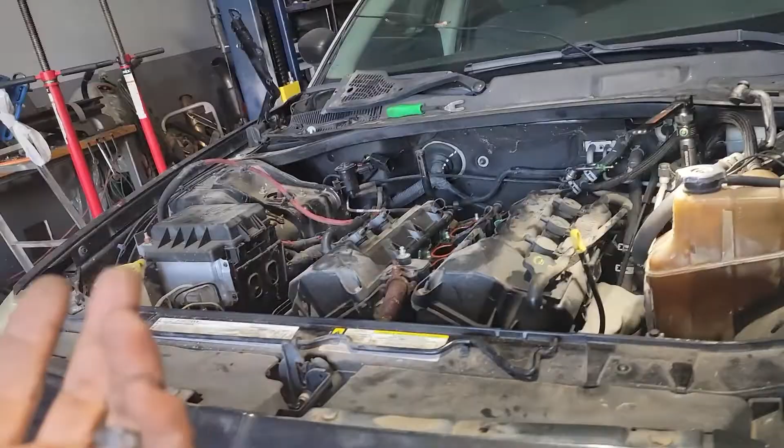Two projects in the shop. The first one is my Magnum that I bought. Was just gonna fix it up, get rid of it. Sort of a flip thing, but never really got around to it. It kind of ran, the tank was varnished. I put pumps, whatever, and it kind of runs, but doesn't run good.

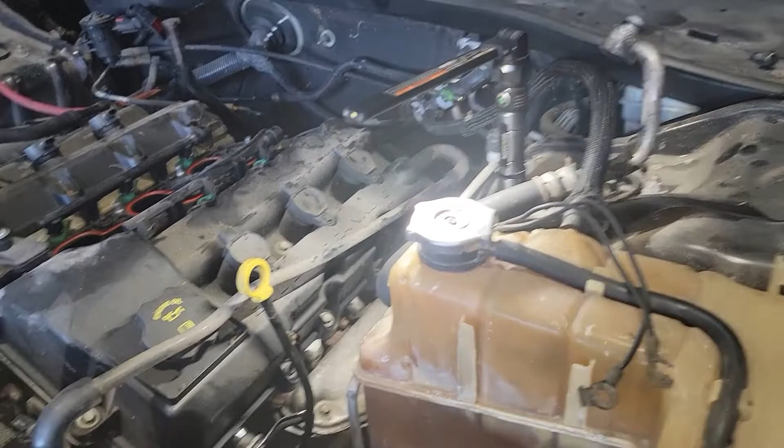As far as it runs good, the motor's solid, but either the injectors are gummed up or something like that, which very likely could be because the tank was disgusting varnish. That's basically what it looked like inside that injector.

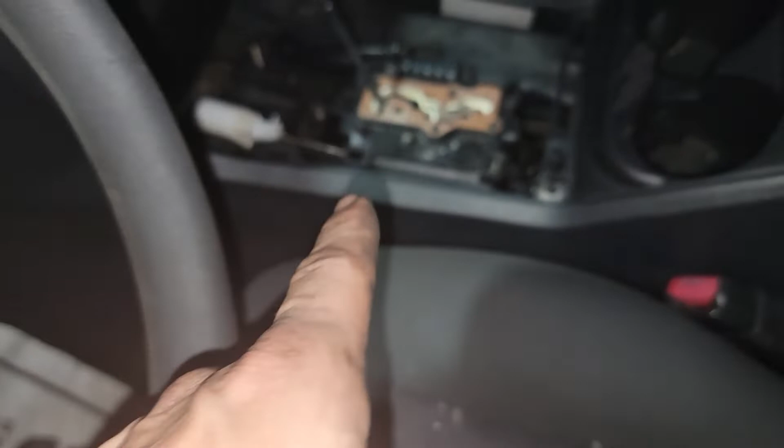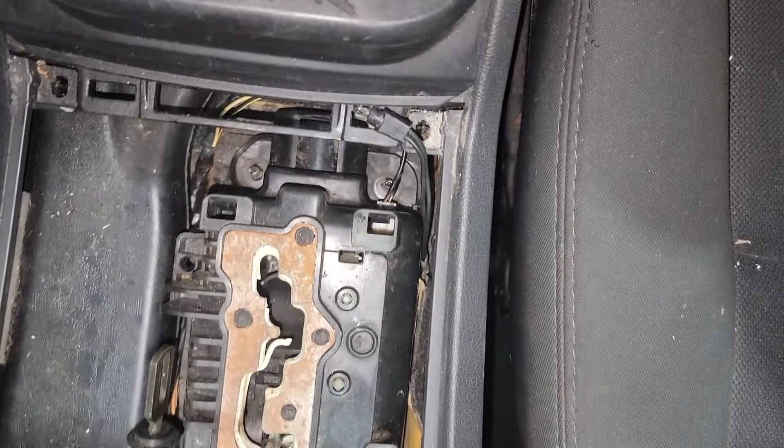So I got all that fixed, and then the shifter was an issue. There's a piece up in the front that breaks that the cable ties to, so I bought the updated piece and put it in. It still didn't work. But then I realized down in there's a solenoid that actually unlocks when you press the brake, and it's bad, and I don't know anything about that solenoid.

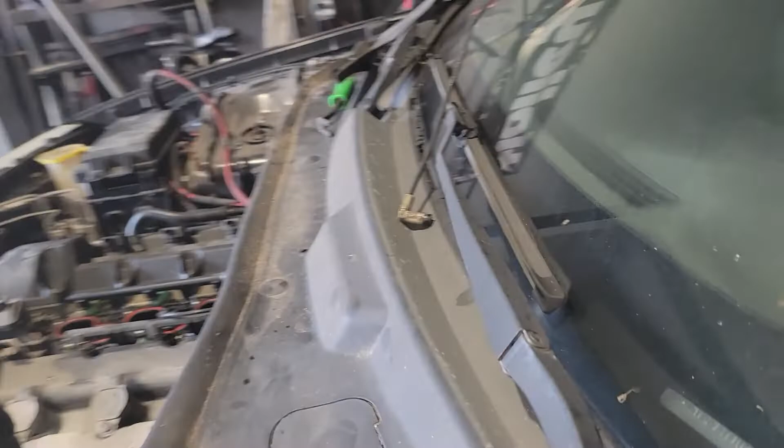So literally this is how it sat, with all the pieces all over the place, and I was like, I'm out, done. But I came across a deal.

Basically a Vortec 6.0 out of a truck, like the LQ4. So I came across that long block. I bought it a couple years ago. Well, sort of bought it—didn't really buy it, I obtained it. The gentleman that had originally bought it passed away, so we're now in possession of the motor.

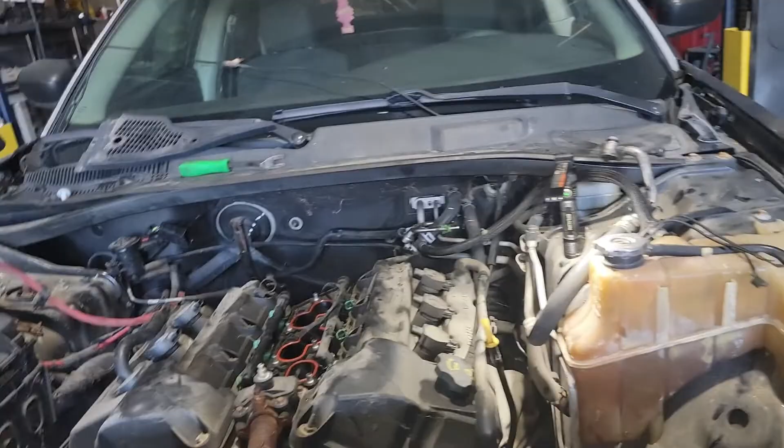So that's what we're going to do. We're going to go ahead and pull this motor out. I already got everything off. I didn't record it, but I took the airbox off, then the intake off, and then started disconnecting all the harness. Just figured if I'm going to sell the motor and transmission type of thing, I'll sell it with the harness and the ECU.

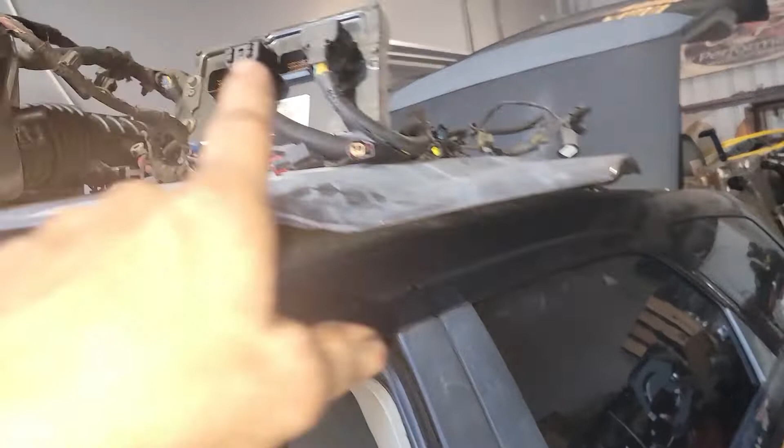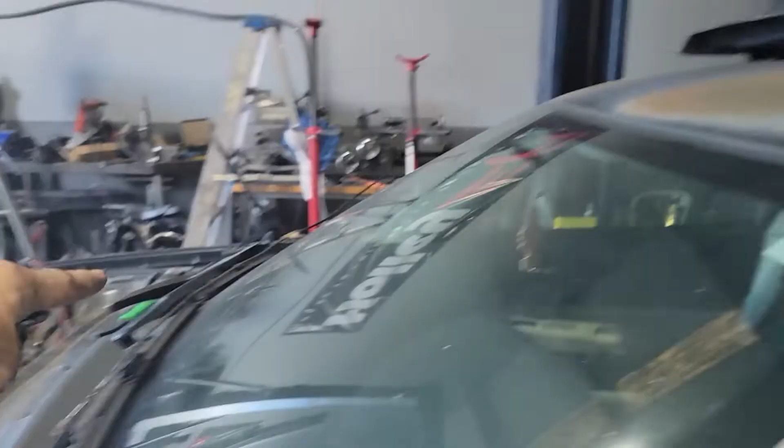Pretty neat, actually, I've never worked on Dodge really, but those two plugs are the entire engine and transmission harness. So you unplug, like I unplugged the 4 plugs from the ECU, pulled the ECU out. It sits down inside that little triangle opening under the cover here. I pulled it up, unplugged all 4, and the whole engine harness came out.

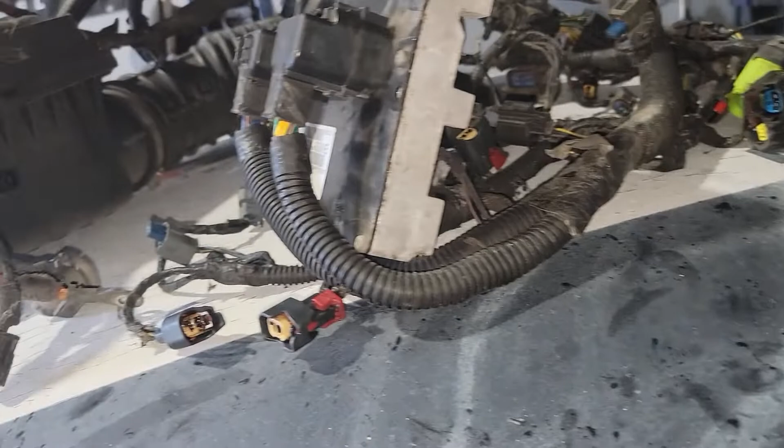The entire harness—this actually goes to the alternator, so that's incorporated in here somehow. Maybe running, I don't know, but it's incorporated in here somehow. The whole harness completely came out, and then there was nothing to cut, no grounds, no nothing.

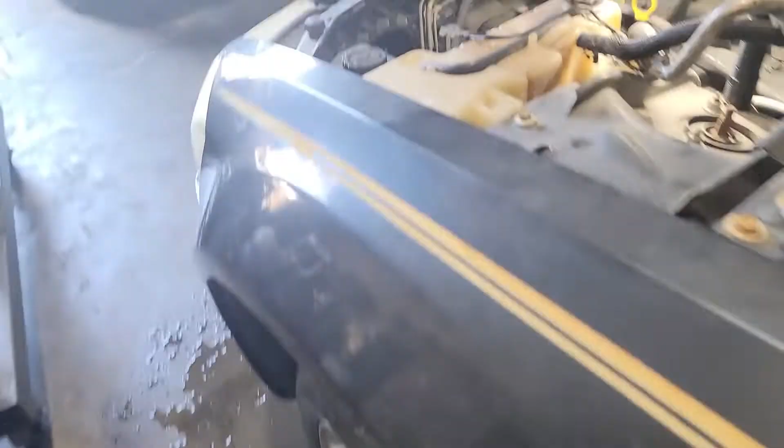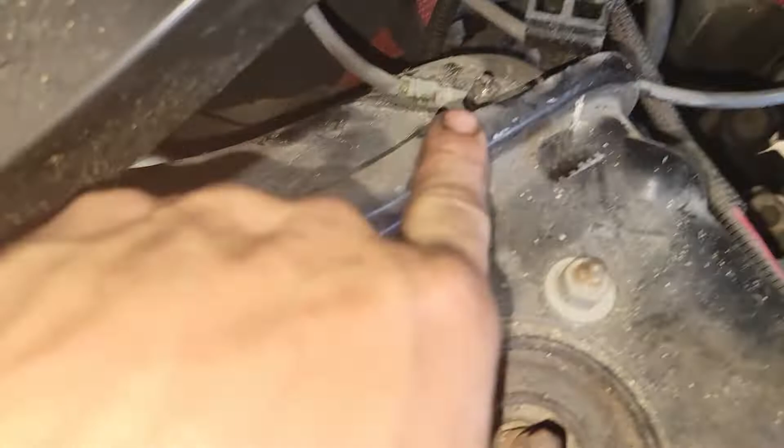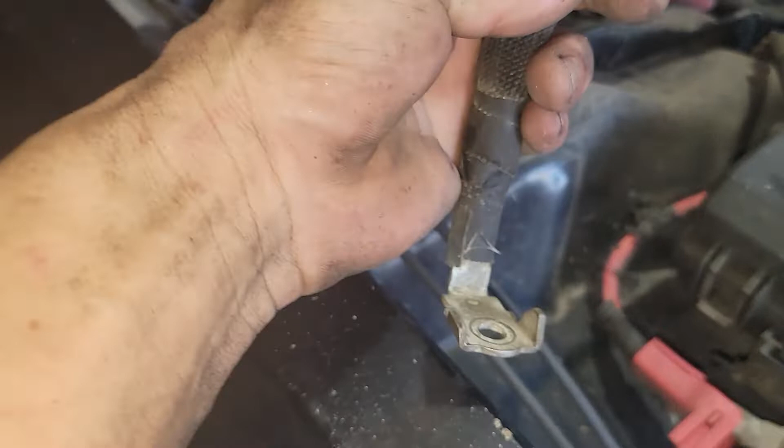I disconnected all the grounds, left them on the car so that I have grounds there. Like these were here, these went over to the cylinder head or something—I left those. There's another one down in there, this big one, I left that. Oh actually, yeah, that wire went to the starter, it clips into this somehow, but I don't know where it goes inside, whatever.

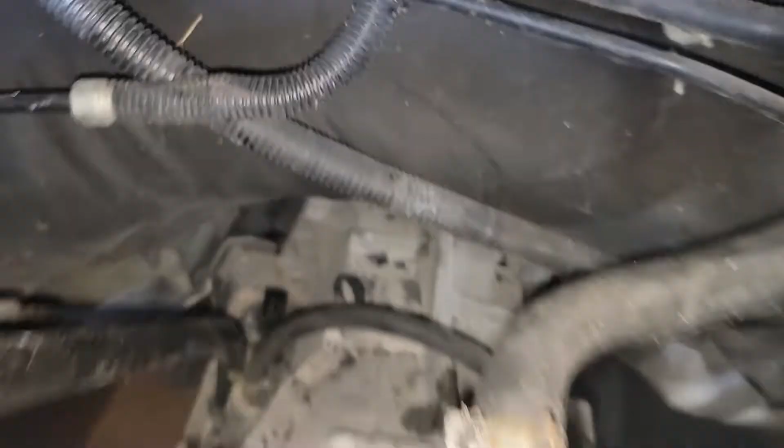So I got everything disconnected, everything apart. All the power steering lines are off, the AC lines are removed, fuel lines disconnected off this side of the rail, which I'll probably pop out of the quick connect there and snap this piece back into the rail because I'll probably never use that piece. Or I may even take it off from there and connect to my fuel line. I'm gonna say the fuel system should be good in this—the pump may be on the small side but it should work.

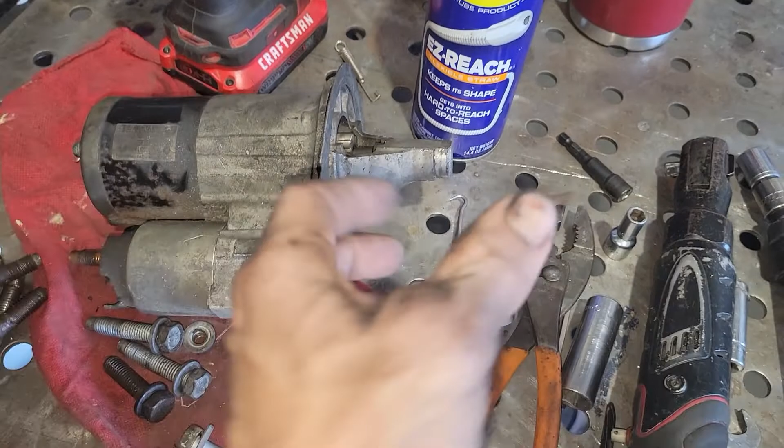The motor mounts from underneath, super easy. Most of the stuff on this car is pretty easy to get off. The starter was a pain in the butt—the snout on it is real long, so it made it really hard to get out of the hole. You had to have all the wires off, but not being able to get it out of the hole made it hard to get the wires off because the big wires sat against the block side. So it was a little bit of a fight, but it wasn't too bad.

But I got that off. Exhaust is completely off on the floor over there, all in one piece. I took the whole exhaust off in one piece, from the manifolds all the way back to the muffler. You could see way back there. Drop that.

Transmission's disconnected minus the drive shaft, which I have to pull. It's a bolt-in drive shaft with torque bushings, so I have to pull that out.

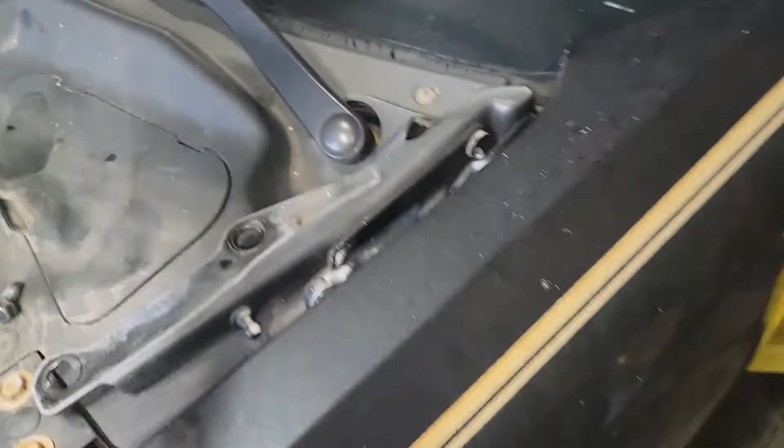That's next, and then I'm gonna hook the chains up to it and start yanking on it. It's convenient, it's got 2 bolt holes there that I'll use, which do not duplicate to this side, but there's one back there and one up here, so we should be good. I yank the whole thing, motor, transmission, everything together.

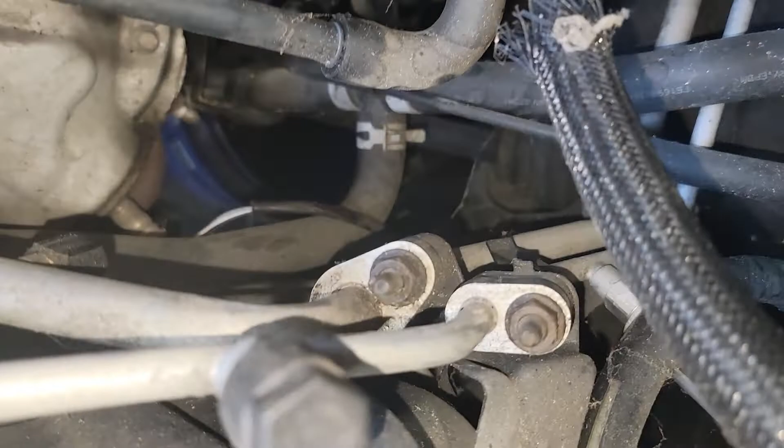I think I got 1 heater hose there, then 1 down there, down there. Clamp's already off the bottom. I'll get that one off. I'll put it up on the lift, take the drive shaft out, and I'll be right back.

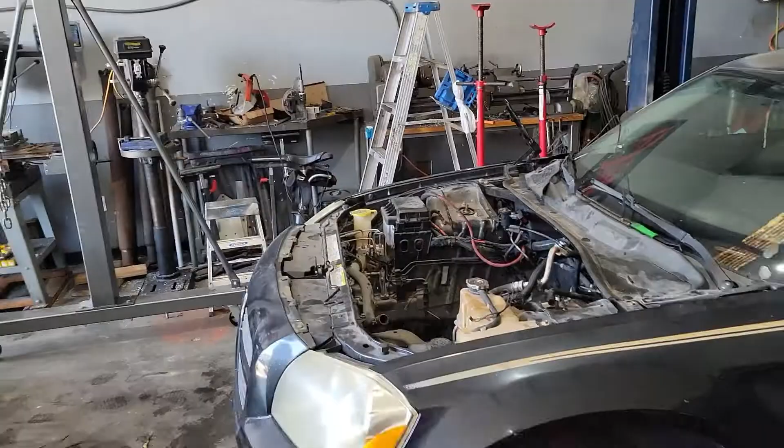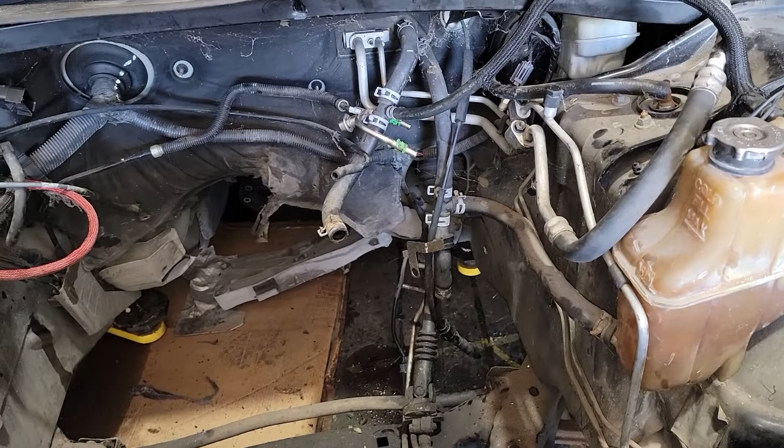All right, check it out. Motor, transmission's out, everything's disconnected cleanly. The only thing that I don't see is a return line for the fuel.

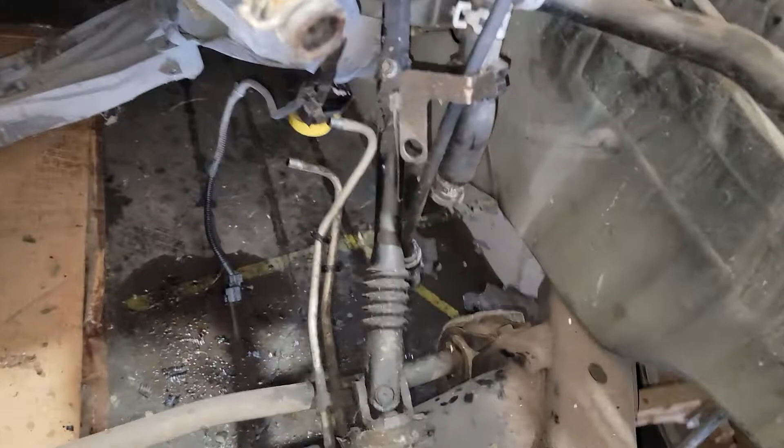So, not really sure how this fuel system works in a sense. That's obviously the feed, it goes to the rails. So I don't see a return line, so I may have to run a return line. I'm not worried about that, but the transmission lines are obviously on the wrong side.

Yeah, I made a mess. But the AC lines, I disconnected them. Power steering lines, everything's disconnected, neat and clean.

And I pulled the motor out and forgot this heater hose that was on the back of the motor, but I found it before I yanked it out. So should be good.

My goal for this car is 100% have it streetable, 100% streetable.

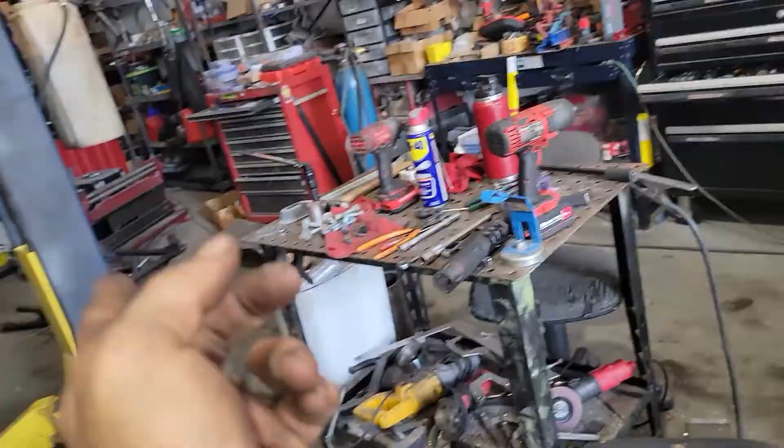So it'll have power steering, which I have a different bracket set up from that motor there that I may use on the front of the 6.0 if I can. And it kind of has more of like the F-body style pump on it.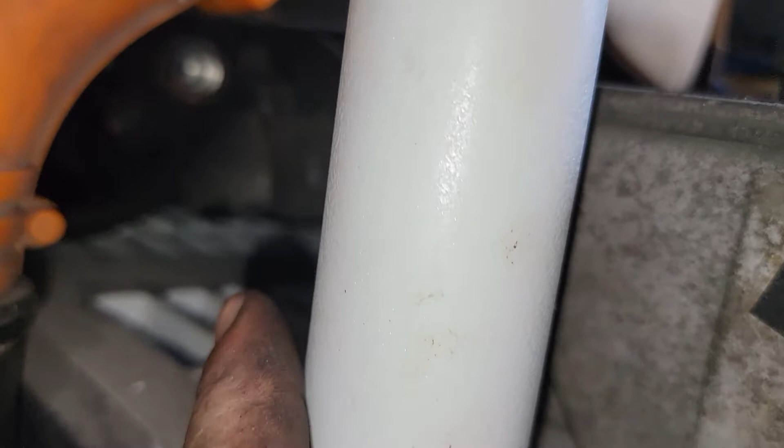You can see it down in there. And I believe it has a remote reservoir. Yeah, it had a remote reservoir.

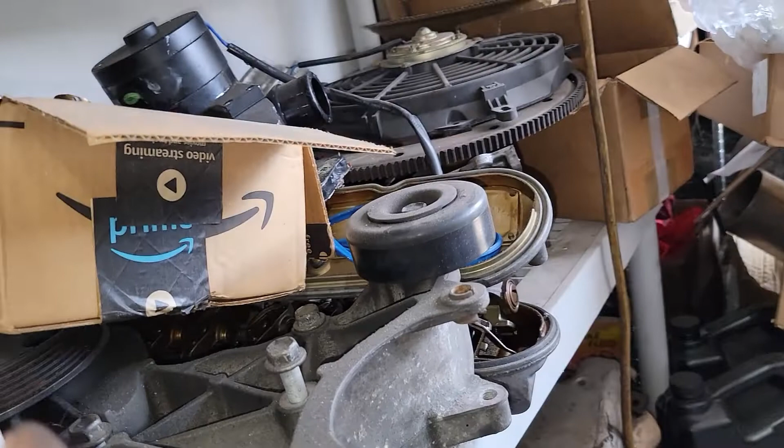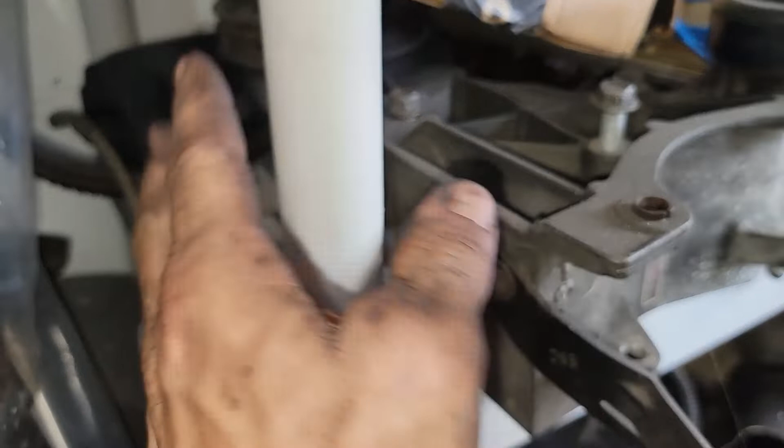Yeah, so I should be able to use that pump there and this bracket for the front accessory, and that way it'll be a little bit easier for me to hook the power steering back up. What was I gonna say?

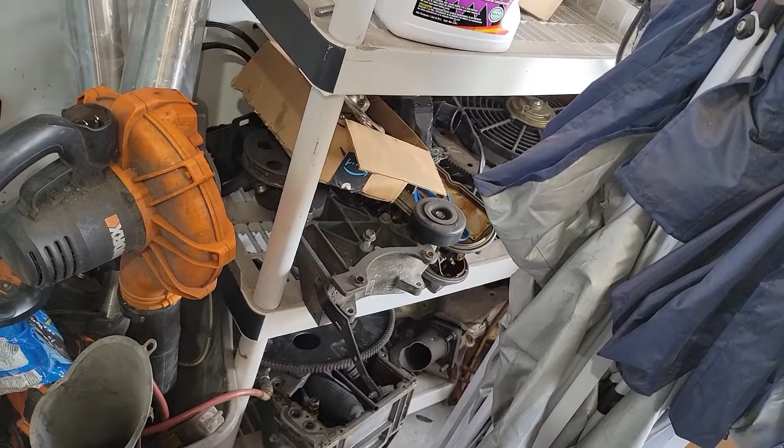So what I have so far is a big pile of parts over here. The debate right now, a couple debates actually, in my mind.

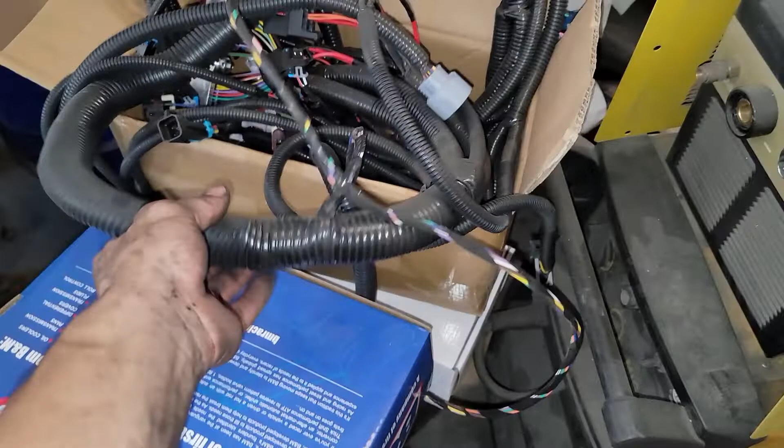I did get off of Amazon, I did get one of the cheap harnesses for a standalone OEM style ECU setup, being that this is kind of not going to be a turbo build race car type of thing. And I'm actually fairly pleased.

The connectors, every connector is brand new, every wire is brand new. The sheathing they used, it's just the corrugated crap, which I don't like. But underneath, they taped the entire harness. So I can literally pull all this off and just re-put on like a nice braided wire wrap on it and have it look a little bit cleaner. But it has everything on here.

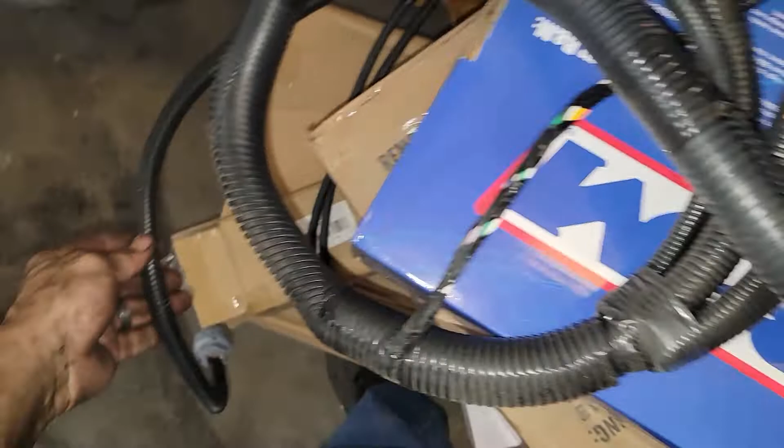This said it's for a 4L80, but it only has one input sensor. I'm accustomed to doing the 2 input sensors, so I'm not sure why there's only one. Well, then again, there's 2 right there. I'm wrong again, there's 2 input sensors for the transmission. So this is 4L80, but it has everything.

It's got the fuse block for everything. It has a relay for something, I think that's to turn the ECU on. Like everything is here, you know, it has nice grounds. Everything's to a nice ground, just like factory stuff.

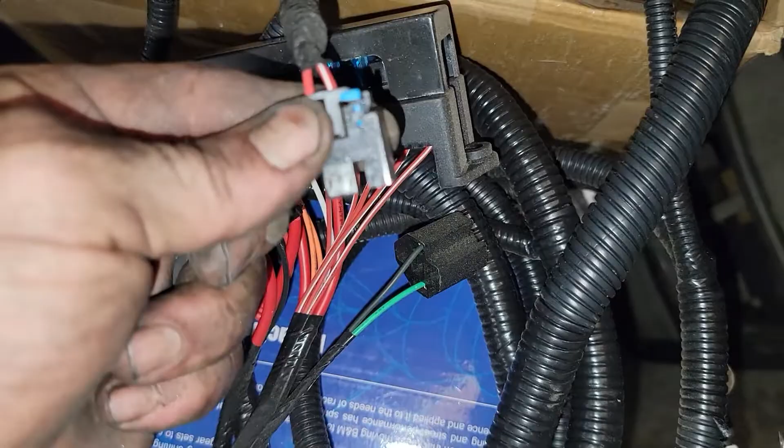There's another relay in there, and then it has every injector adapter. So these are the Multec, whatever, like the GM truck style. Then it has the Multec to EV1 style in a bag, and it also has the Multec to EV6 in a bag, which I thought was pretty crazy.

So this is the company here that I got this one from, Pangolin. I don't know, Pangolin, I don't know, it's off of Amazon. It was like $129 or something.

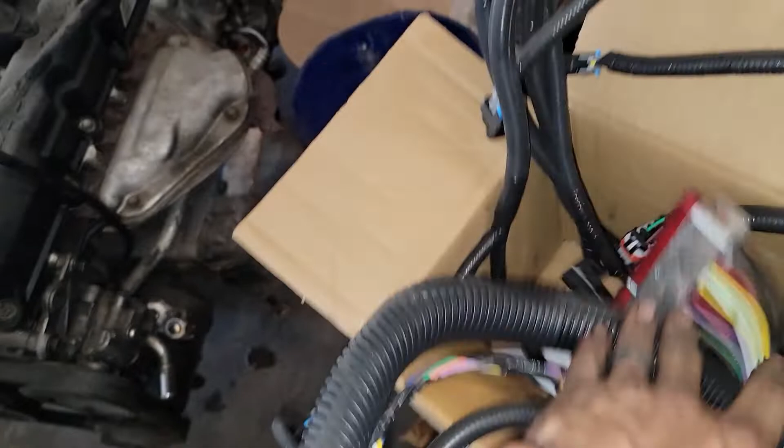Fairly cheap. So I have a bunch of ECUs that I can make work with it. I have HP tuners, so I could throw a tune on the car.

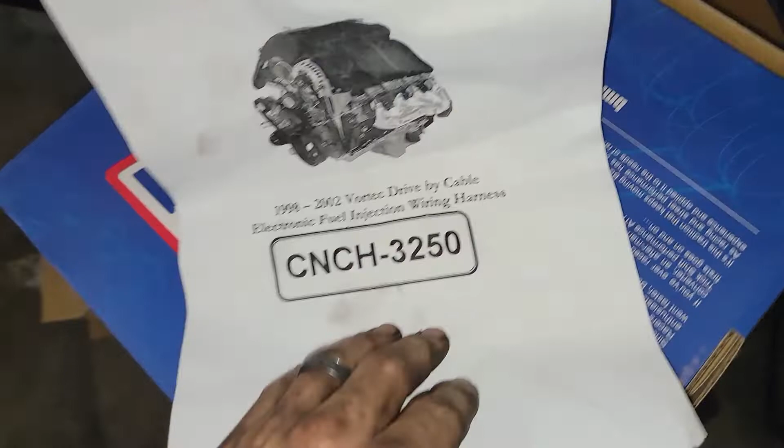It also has every wire for like your accessories, gauges and whatnot. It has an instruction book, I never even looked at it to see what all it does have. So it's a 98 to 2002 Vortec drive-by cable.

List of terms here. It shows you where every single wire goes. So it lists out every single wire that's in there.

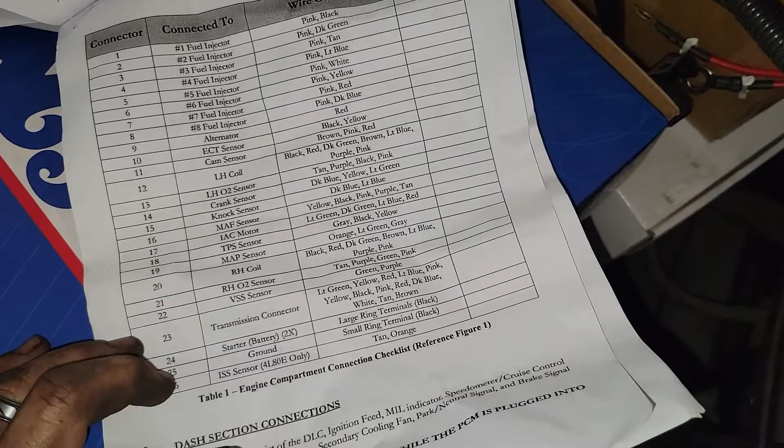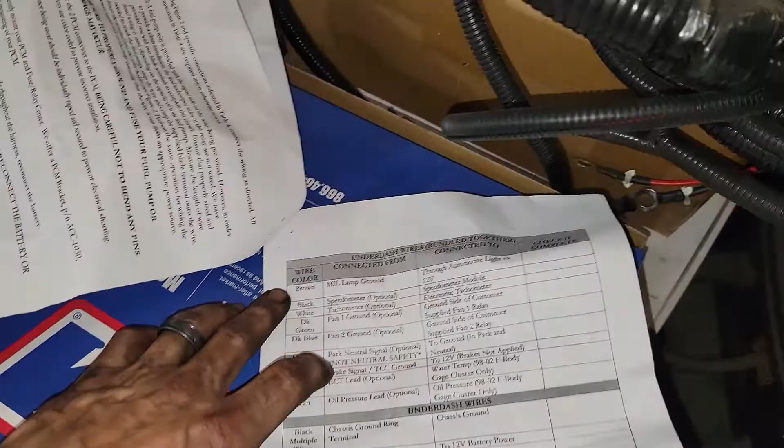Dash connections, so wires in this section are DLC. There it is, brown, so in this loom right here, you got brown right there for the check engine light. Black, kind of black right? I don't know, that looks green to me. Looks green but it's got black on it. So black is speedometer, white is the tachometer.

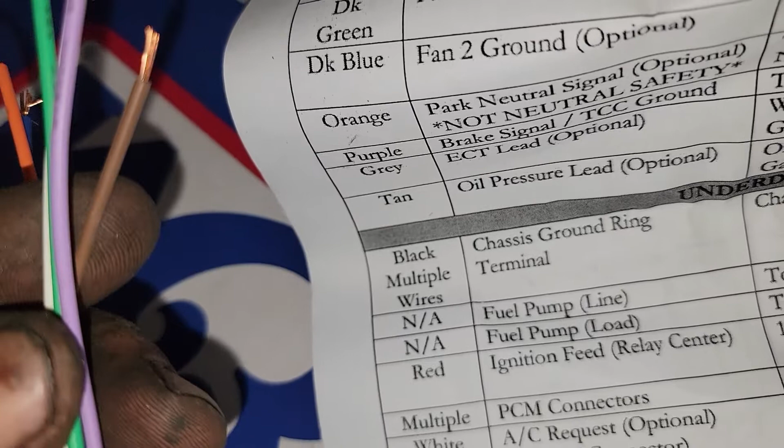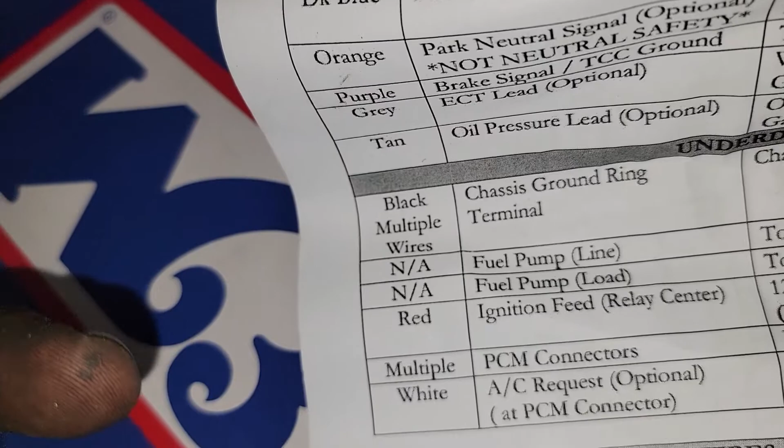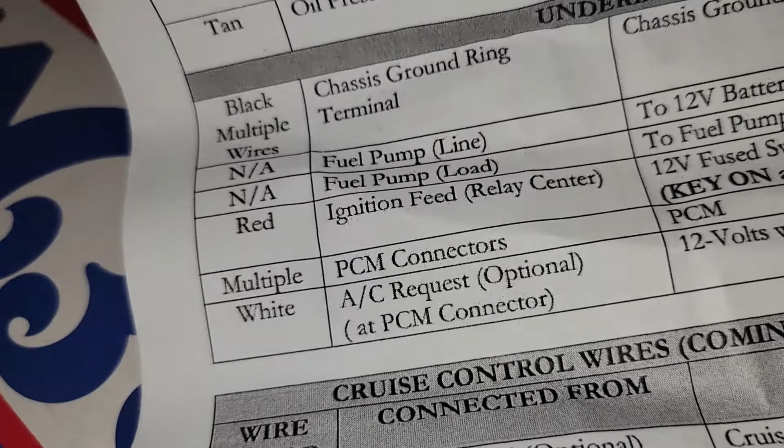Dark green, okay, fan 1 ground, dark blue is fan 2 ground. Orange is park neutral signal, that's pretty cool. Purple is brake signal for the torque converter clutch. Gray ECT lead, water temp. Okay, I don't see a gray. You bastards. Yeah, I don't see a gray one in there. And a tan? I see a yellow.

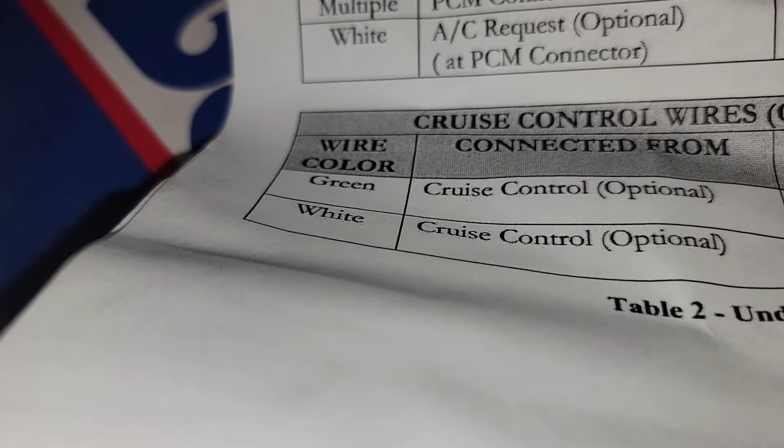Two browns, one has a white stripe. So I'll have to figure all that out.

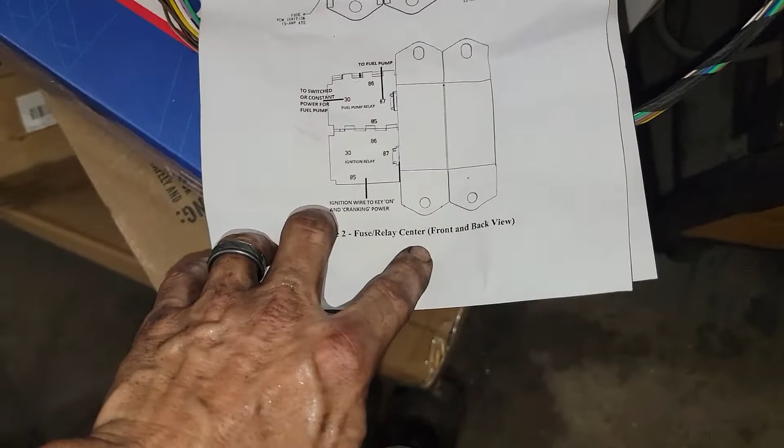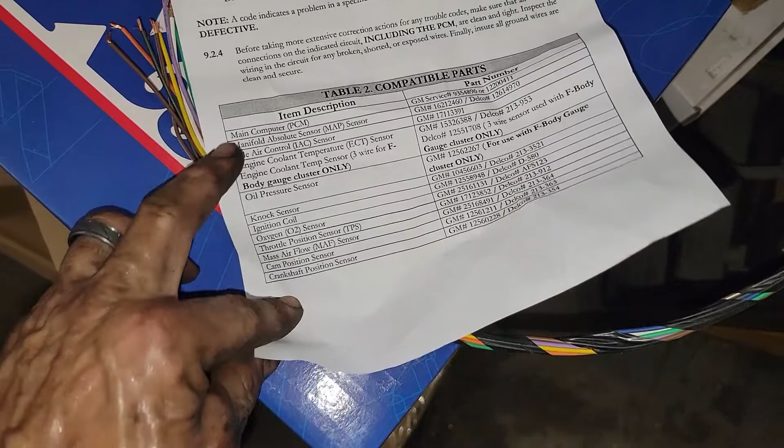Under dash, I have no idea. Oh, then there's cruise control. Oh shit, so this has everything. Oh actually, yeah look at this. Wow, look at this, look at this. Would you just look at it? So it's got fuel pump, ignition relay, tells you how to hook up for the cooling fan, tells you how to hook up for the brake switch, tach, you may need a resistor, okay. Tells you what MAP sensor, idle air control, tells you everything. Well, I mean, tells you a bunch of stuff.

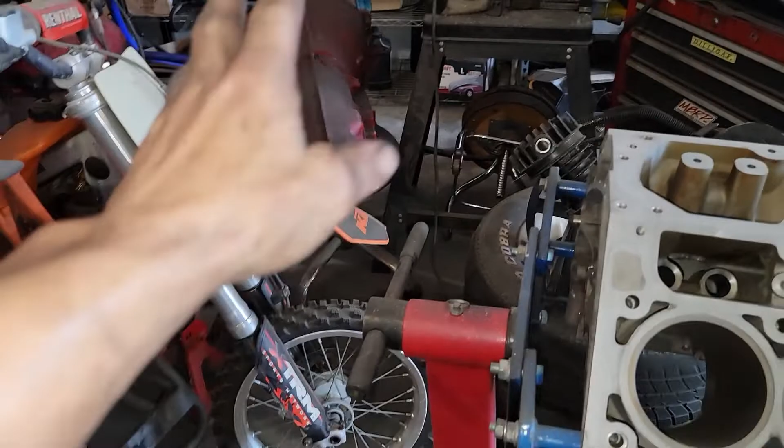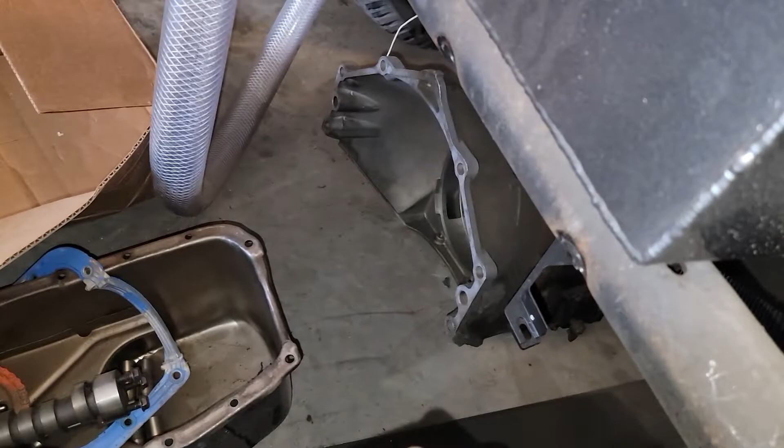Who knows if it's everything or nothing, but yeah, so I got that. Whatever, I do plan to do a 4L80. I have one here that needs to be looked at. I have one there that needs to be looked at. And then hiding in there somewhere, right there, is an empty case that I use for mock-up. But I also have every single part for it in there, so I have enough 4L80s. That's what I'm going to do.

So I bought this one, a B&M Magnum Pro stick with dual buttons, part number 81104. And it's freaking nice, I actually really like it. I'm not usually a big B&M fan, but I kind of like it. So I plan to have two-step on there. I did order an MSD two-step box. Why not?

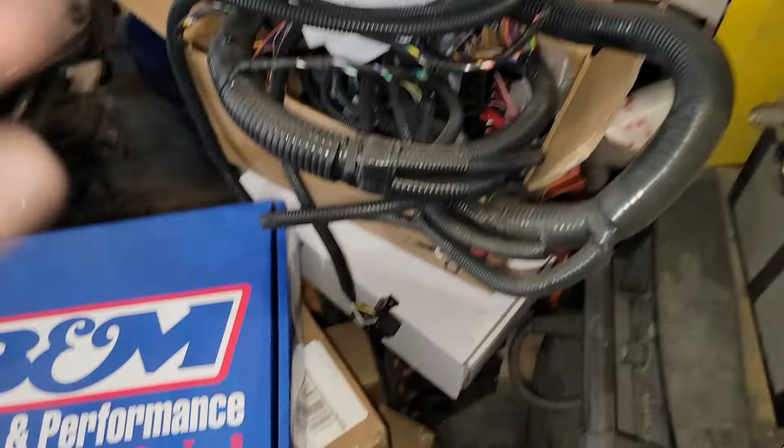And that was kind of my big debate. If I bought a Terminator X Max, you're looking $1,300-ish, but it has everything, it has boost control, it has everything in it. So you really get a lot for the money. But if I did that, then that adds a big expense to the budget, and I want to do a cam in it and all that stuff.

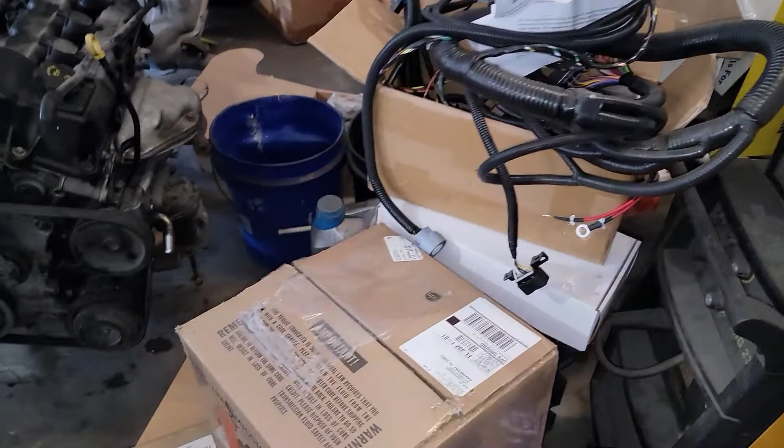So I said, well, why not spend the money on a harness, and then I could do a converter instead of a stock converter. So this is Total Transmissions of Chicago. I saw them on another channel, I don't remember which one, I screwed up and didn't write it down. I talked to Justin over there, dude, super cool. Never used his converters before, but for the 4L80.

It's a 2800 to 3200 lockup converter. It's threaded, the flange is threaded, has a coat. I don't know if that's a coating or if it's just been sandblasted to almighty hell. But so I got that.

So we had a stall converter, and then I got carried away and ordered what would be called the Sloppy Stage 3 camshaft. There it is. So it's an Elgin E1841-P Sloppy Stage 3. Intake duration 238, exhaust duration 242, intake and exhaust lift is 595.

So this cam's got a really good sound. I know it's a sloppy mechanic cam, and I'm always like, I'd never do that, but for the price, this could be found on Amazon. It's billet steel, so I'm gonna give it a shot.

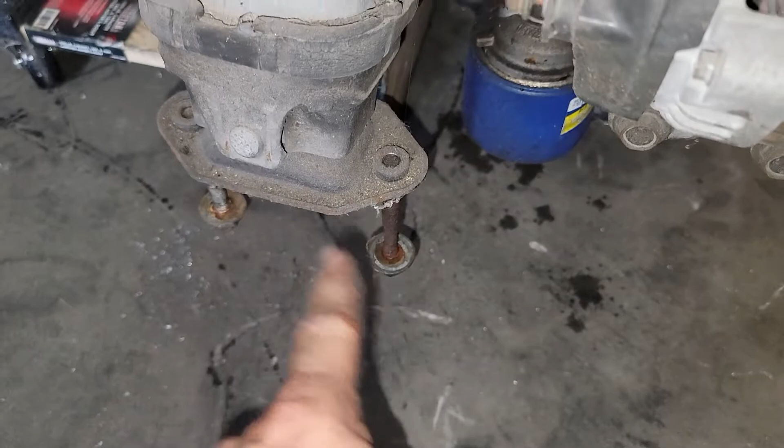Oh, this is like a universal motor mount, because every single freaking piece is individually wrapped, because the way the frame is on the Magnum, there's no motor mount. Well, you could probably do like a Corvette style motor mount, but these go through the frame. I'll show you.

Those two holes there and these two holes here, so those bolts drop through the frame. So being that it has that subframe there, I'm thinking I may need to cut that subframe out to clearance for the oil pan, and I'm okay with that because it has a front subframe. So I'm all right with cutting that frame out, or cutting a section of it out and then plating it and doing sort of like a bar to support it back. I don't know, whatever.

But it also has the frame up here, so I could weld. These are like the 2 tab style. So this goes on the motor, and I got these so they're centered. So the bushing is centered, but it has the slots to adjust. Sometimes you'll see these are shifted way back on the pad. That's gonna be the other one.

Bullshit. She's coming down, Captain.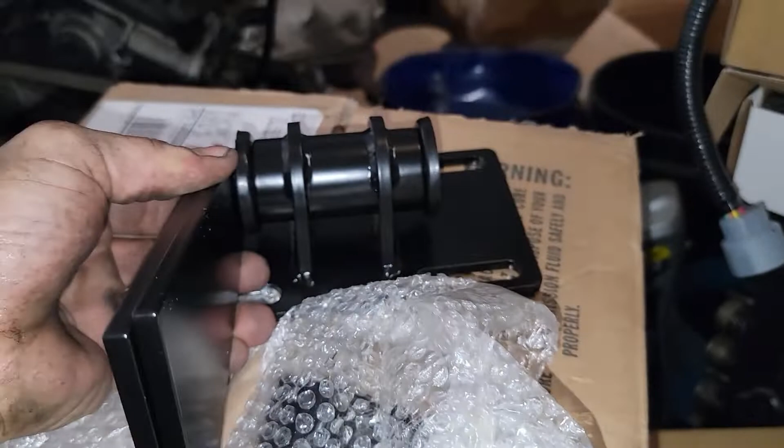So these came with everything. So these long tabs here, take 2 of them, put 1 on each side, put the bolt through it, and then you could weld this bracket to wherever you want. Of course, grind off the powder coating that they put on the weldable bracket, and then you can weld this bracket to wherever you want. So I'm going to try to stand them up on that subframe. If that don't work, then we can go sideways to the frame. If I need to make these a little bit longer, it won't be a big deal.

But it came with the bolts, the nuts, came with everything. And again, this was super cheap. So I'm tallying up every single dollar so far that I have in it. And to be 100% honest, the converter was the most expensive part. It was like $429 shipped, $480 shipped to my door.

So we're gonna be trying Justin out. He doesn't do big performance converters like we do with the drag cars, so that's a little unfortunate. But if we do get some more people that want converters for kind of streetable type stuff, we have all that.

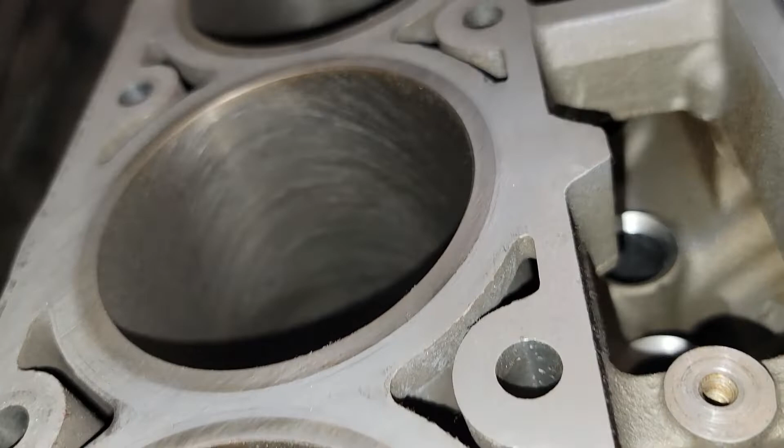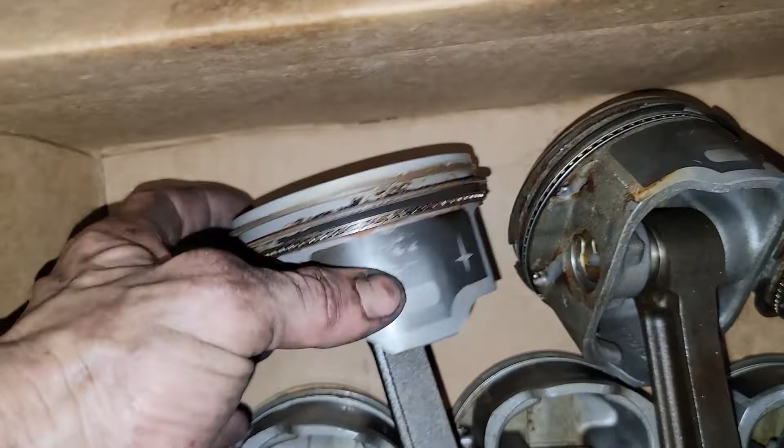So I got all that stuff. I got the 6.0 in the other bay. I'm also going to be putting, they're hiding back there, those are a set of 243s that came off this 5.3 that are spotless. This block, I got this as a long block, and I barely ball honed it, and the cylinders are like perfect. So this is a Gen 4 aluminum 5.3. Even the pistons, they still have all the factory coating. These aren't even cleaned up, and there's hardly anything. Oh, there was some carbon on the top.

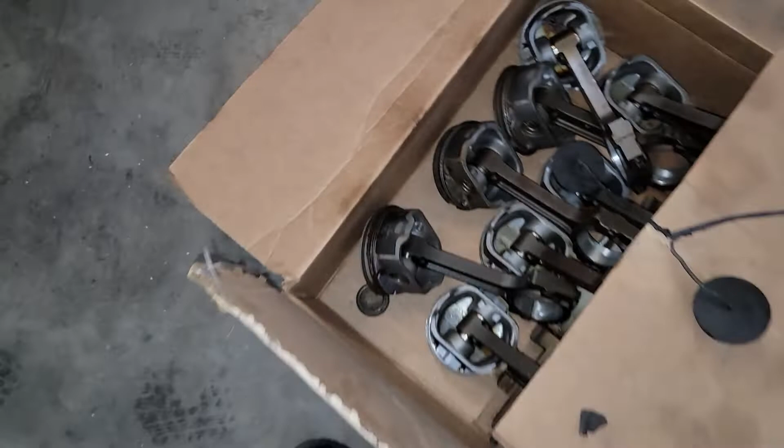I did wipe them with a rag, to be honest. But everything's really good with that motor. So here's another debate I have: do I do a Gen 4 aluminum 5.3, save the weight? That null and voids that harness, which I could convert it, but, you know, why bother? So I'm not sure. A lot of decisions.

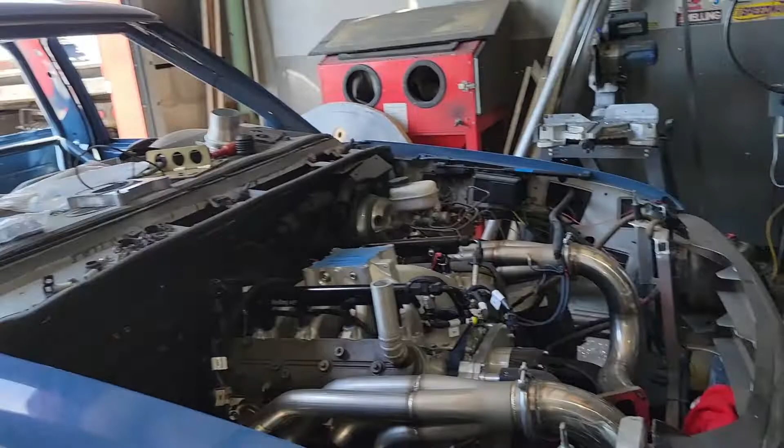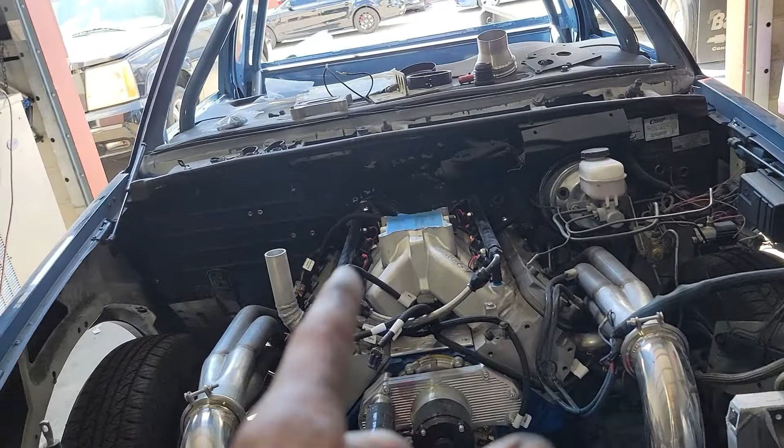I don't know. So kind of working on this while we are working on Jeff's Smurf S10. I'm calling it the Smurf because he painted it blue and it looks like Smurf blue to me. So now this is the Smurf S10. If you haven't seen in the prior video, it's a Gen 4 6.0 bone stock. We stuck a nice Tick Performance cam in it. A little bit different of a cam than what they would normally recommend, but cool cam, should work really good.

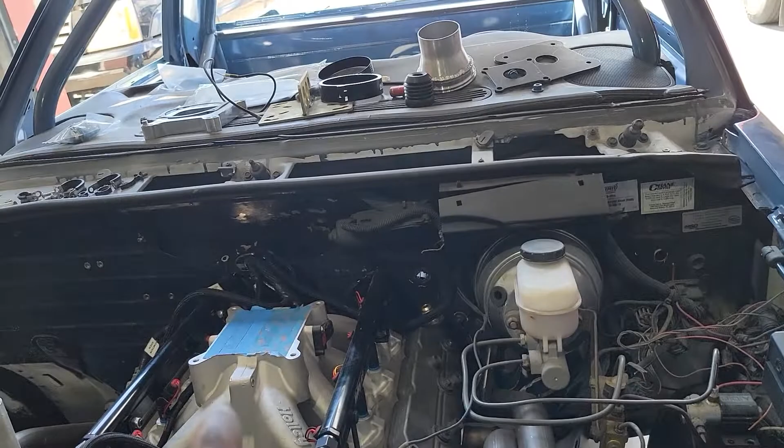It's got a set of 706s, so it ups the compression some. Has a Holley split intake because he's fancy like that. Holley Terminator X. Flowtech headers, forward facing headers. I built the turbo kit. He's got a VS Racing 88 right there. Air to liquid, I don't know what's in that box. Oh, that's the intercooler stuff. Oh, the radiator's in the other bay.

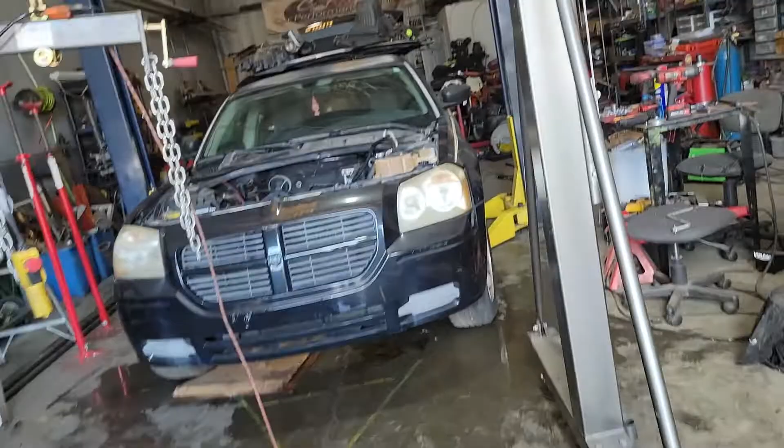But then, because, you know, he's Jeff, he's pinky up and all that crap. Yeah, that.

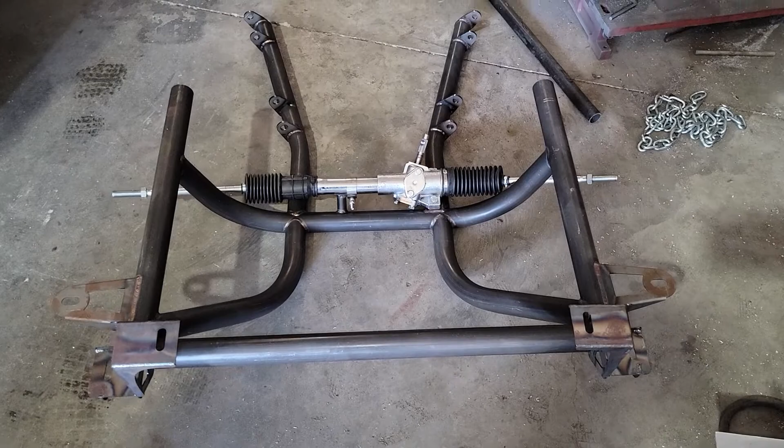Yep. So that'll be coming up while I'm working on Jeff's truck. I'm gonna work on the Magnum in between because, you know, he had to be all fancy boy and get lower control arms that only accept coilover shocks. So he's gonna get a nice rod, one up his ass and one in the front end of his truck. So that's what we're doing. That's what we're working on. Trying to get shit done.

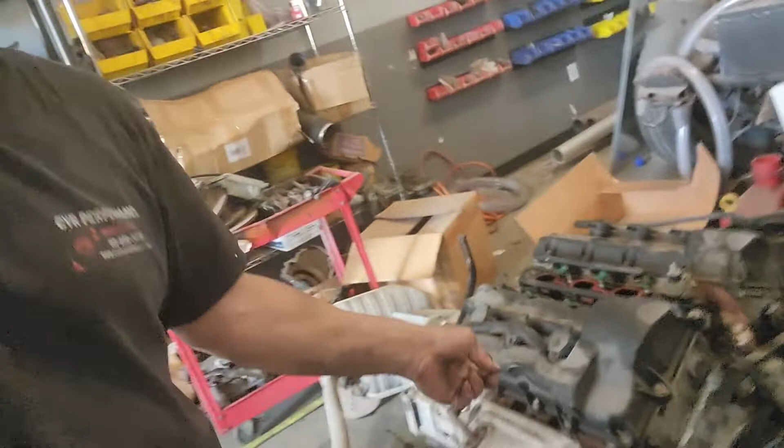But we're plugging away. So I'm gonna grab a block, my case, I'm gonna get all that pulled over here. Anybody that wants a good running 2.7 V6 24 valve dual overhead cam with transmission, harness, ECU, everything. I didn't even take the belt off. Where's the belt? Right there. I didn't even take the belt off. Comes with everything. Hit me up.